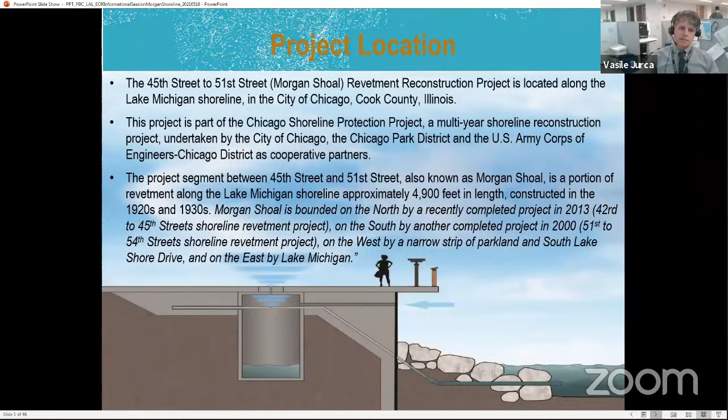The Morgan Shoal Shoreline project is located between 45th Street and 51st Street along the Lake Michigan shoreline. It is approximately 4,900 feet in length and is bounded by two projects already completed north and south. This project is part of the larger Chicago Shoreline Protection Project, a capital improvement project undertaken by the Chicago Park District, City of Chicago, and Army Corps of Engineers to improve and upgrade approximately 9 miles of shoreline.

What makes the Morgan Shoal project unique is the presence of the shoal itself. While the shoal provides protection from some waves, it also poses challenges and offers opportunities for some exciting new solutions.

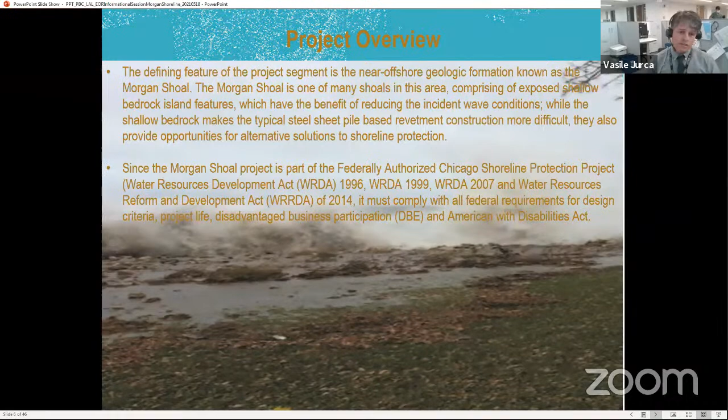As Sarah mentioned, in 2015 the Park District, the City, and Army Corps, using an IDNR grant, developed a framework plan for the Morgan Shoal project area. Included in the process was the local community, elected officials, NGOs, and other stakeholders.

The plan looked at not just adding shore protection, but also at transforming this narrow strip of parkland into a more usable, feature-friendly space. For instance, a natural pebble beach formed at 49th Street over the years, and we've heard repeatedly from the community during the framework process that the plan should include rebuilding that pebble beach.

Community involvement was key to the development of the framework plan and its success. A series of public meetings were held in 2014 and 2015 until the framework plan finally took its current shape. Through the design, we'd like to continue the success of the public engagement process with additional public meetings and outreach.

A little bit of history of the shoreline: Chicago's shoreline is for the most part man-made, with Burnham Park in particular dating from the 1920s. Several iterations and successive improvements were made to the lakefront park system, resulting in the most recent shoreline projects visible throughout the Burnham Park system today, as well as other Park District improvements such as the Burnham Park Wildlife Corridor or the 63rd Street Dune Restoration Project.

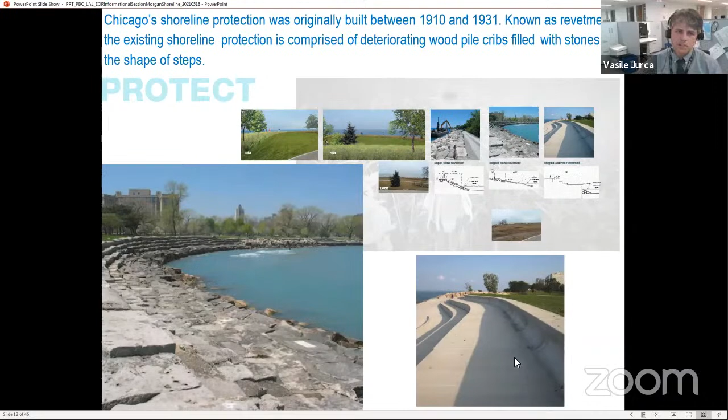The revetments originally constructed were made of stone blocks in the shape of steps sitting on top of wood piles. The current preferred solution for revetments mimics this look, but updated with concrete instead of stone and steel sheet pile instead of wood piles.

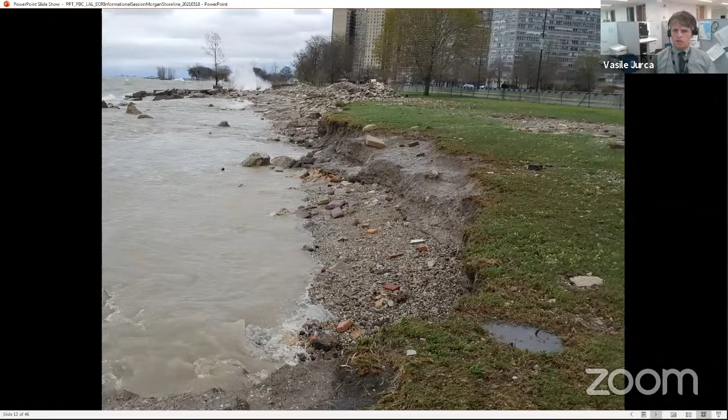Several storms throughout 2019 and 2020, through the period of high lake levels, have done considerable damage to the lakefront at Morgan Shoal. This photo shows an active erosion zone at around 48th Street where a scarp has formed as a result of the battering waves.

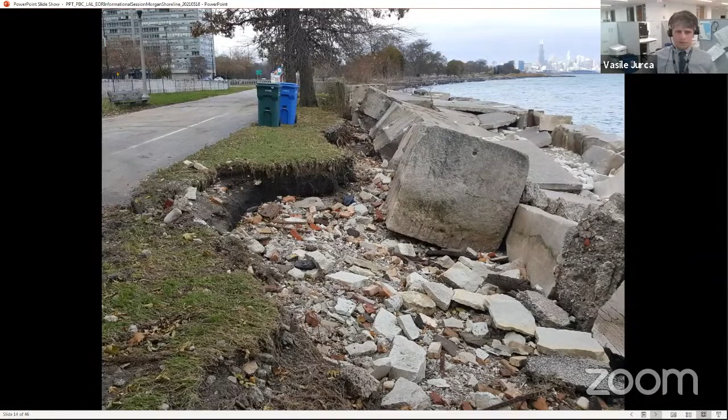Further south at around 49th Street, erosion toppled the old revetment blocks and damaged the parkland and the lakefront trail, as you can plainly see here.

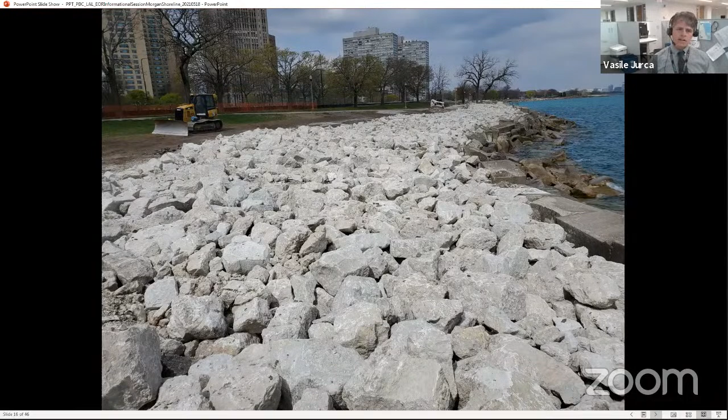Responding to the current erosion and damage, the City, Park District, and Army Corps is currently completing an emergency revetment project consisting of riprap revetment at the most threatened locations along Morgan Shoal.

As well as concrete blocks to add crest height in the most narrow areas. This revetment is temporary, and materials from this current work will be included in the capital construction project. In addition, the Park District placed trap bags at 48th and 47th Street to stop further erosion.

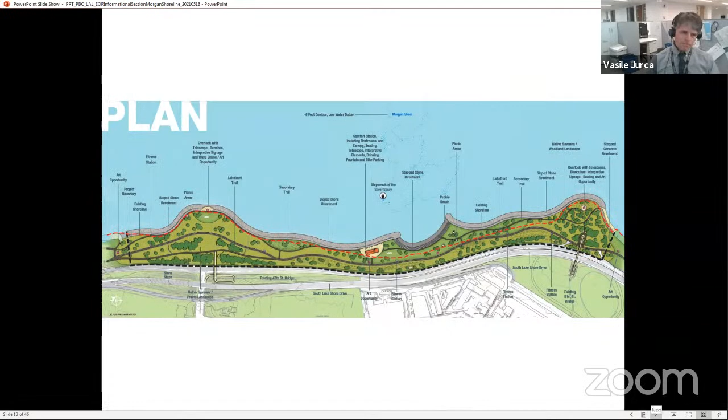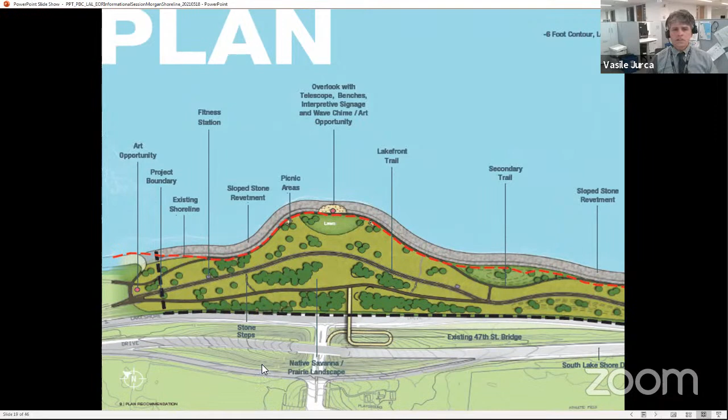Here's an overall plan from the framework plan that came out of the public process. Apologies for the scale, especially on such small screens, but this plan will be made available to all electronically. Let me mention some of the features that the plan incorporated. Of prime importance, obviously, are the protection structures, which are a mix of concrete step revetment, stone revetment, and the pebble beach.

Looking closer at the north end, some of the features include an overlook, a large lawn area, and several trails. Towards the middle and south end of the project, we have a proposed comfort station, a pebble beach at 49th Street, along with picnic areas, an overlook at the south end, and additional connecting trails.

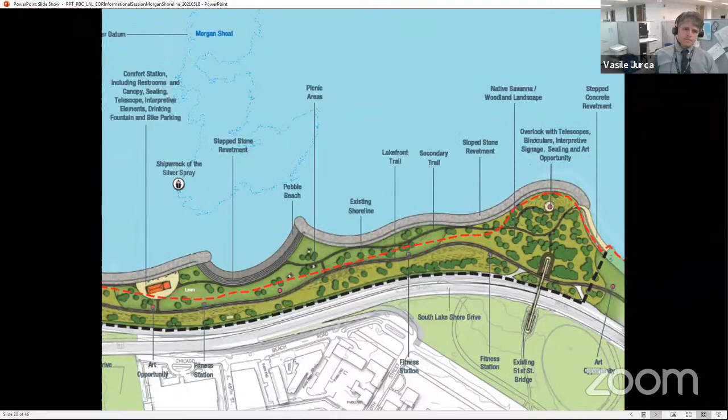The plan, by necessity of protecting Lakeshore Drive, creates an additional 7 acres of land that act as a buffer from storms and the canvas for the amenities already mentioned above.

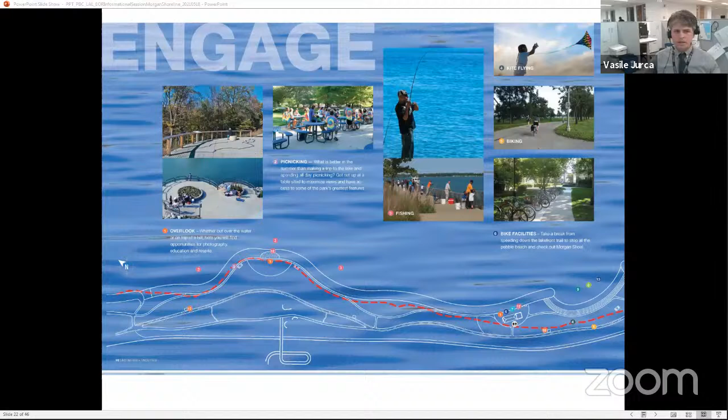The communities, through the framework process, envision the space as offering passive and active zones, which can support activities like fishing, picnicking, kite flying, running, cycling, birding, etc., as well as necessary amenities like the comfort station I mentioned and concessions, and also educational opportunities.

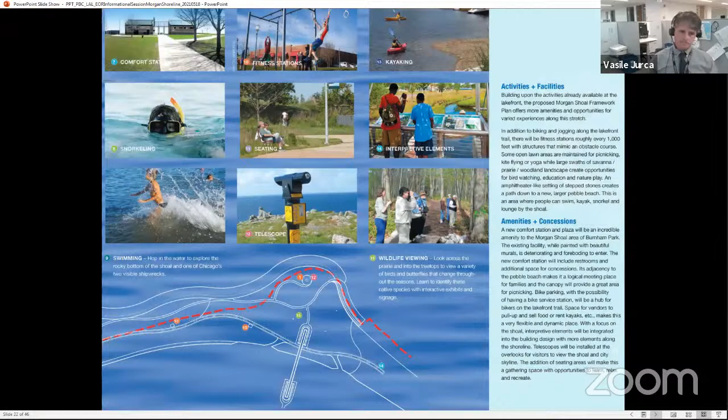Access to this area, north and south, will be continuous through the current lakefront trail system, in addition to access from the west by way of the 47th Street and 51st Street pedestrian bridges.

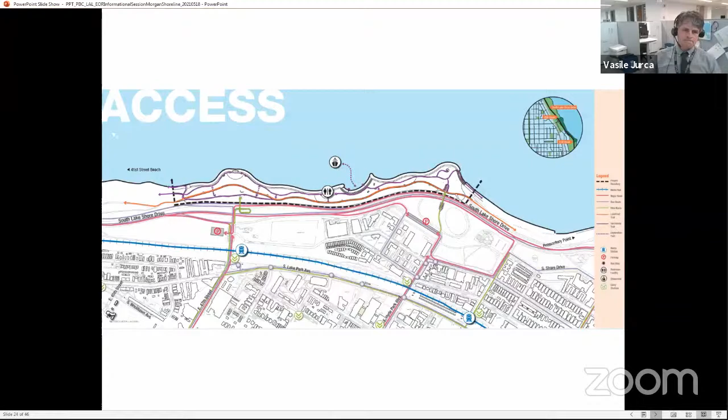Another exciting component for activities is the Lake Michigan Water Trail for human-powered craft, which has been the historical mode of transportation for thousands of years on the Great Lakes. By providing water access, this project creates a link between other sites along the lakefront for watercraft.

Going back to the educational component briefly, installations at Morgan Shoal can include educational signage about the local ecosystem, telescopes at the nodes for distance viewing or birding. Most interesting for me is the concept of a wave chime or sea organ, a series of pipes within a chamber that allow wind to flow through and create natural notes and tones. We've seen this done along the Mediterranean, and it creates a soothing sound that is very interesting. I saw a YouTube video of it, and it's a pretty interesting sound.

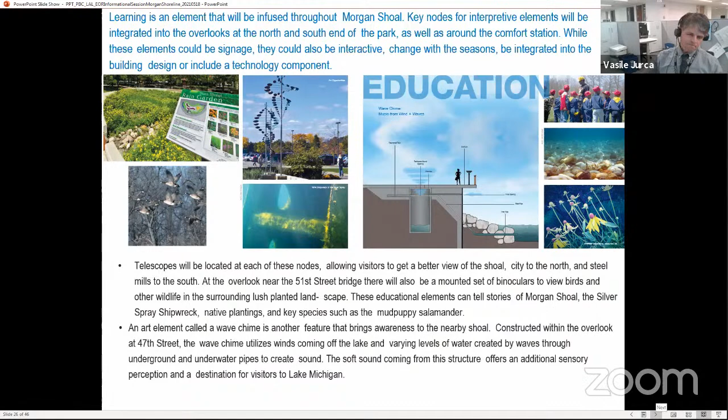Finally, given the location of this project within the Chicago ecosystem, we feel the most appropriate ecological community proposed at Morgan Shoal is what's natural to the area, which is a savanna prairie system.

So now I'd like to turn it back over to Lori for more information on submission requirements. Thanks, Vasile. So again, we appreciate the interest, and we will talk about what our next steps are. Vasile went through the slides, but I want to go over some of the high points we're looking for.

If you're excited about the project, the feasibility framework plan was done by MWH, Stantec, DB Sterlin, Intera, M3 Engineering, Smith Group, JJR, Studio V Design, and Huff and Huff. We wanted to make sure everyone was aware of who has worked on the feasibility framework plan.

These are some of the disciplines, and that's why we put out a big net to determine the scope of work we were looking for. We need civil, structural, geotechnical, coastal, environmental, electrical, hydraulic, landscape, and architecture, and a few other specialties we'll go into. So as you look at your colleagues on the line, make sure you're thinking of possible partnerships and teaming opportunities to cover all those disciplines.

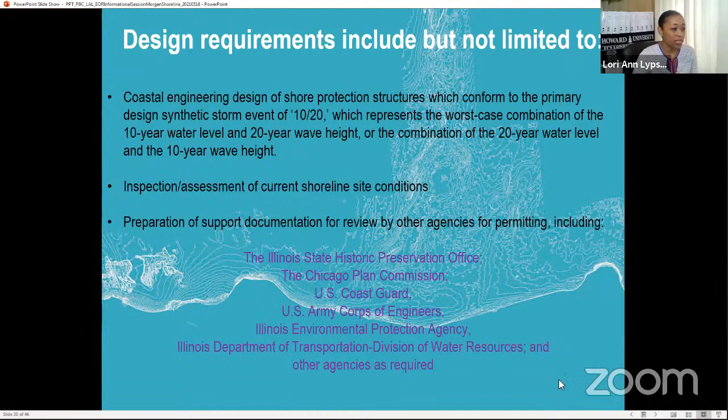Because this project, not only will you work with PBC, CDOT, and the Park District, you'll also have to work with the Illinois State Historic Preservation Office, the Chicago Plan Commission, the Coast Guard, working closely with the Army Corps of Engineers, the Illinois EPA, IDOT, and other agencies as well.

For this project, I know we have some of our construction project contacts on the line too, because they were excited about the project. The anticipated construction cost will be between $30 and $50 million thus far.

We will be negotiating the fees for the architect in July and August, and that is our goal for the schedule. The plan is for the PBC to receive submissions, and we plan to go to our board with a recommended team, the AOR/EOR team. Between Q2 2021 and Q3 2021, we want to do the programming and scope reconciliation.

Right after that, we will go into design and engineering, which we anticipate will take approximately a year. After that, we will go into permit and bid package review, and issue for bid in Q4 2022. That is our anticipated schedule.

So in order to submit, I know we have a mix of folks we've worked with before and some newcomers, which we're excited about. You're going to put together a team and a submission packet that includes a letter of interest. We want this executive summary/letter of interest because it will go to our board with your commitment to scope, schedule, budget, your M&WBE commitment, and it needs to be signed by the principal person in charge of that team.

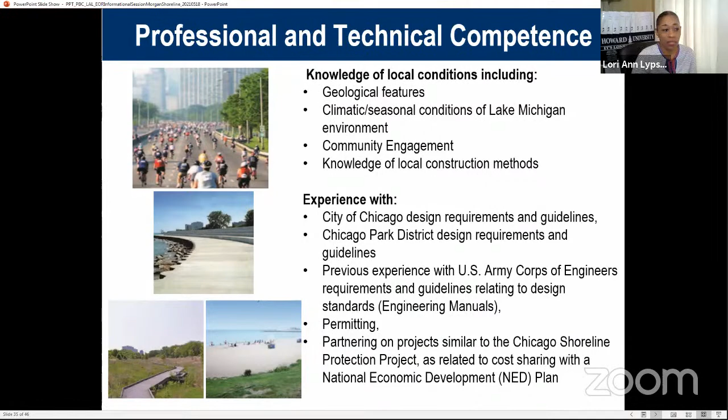We know that's important. Previous experience with the U.S. Army Corps of Engineers, permitting, any shoreline work, any national economic development plan that you've worked on. We also, like I said previously, want to touch on what Sarah talked about earlier, which was the community engagement, and your knowledge of the Lake Michigan environment. I know we showed some of the damage that has happened previously.

Also, we want to see that past project experience. Again, if you've had design of shoreline or revetments, harbor, coves, piers, boat launches, all those things, as well, all those things, we really want to see. And you want to put together that dream team that can show you have the breadth of work that we're looking for.

As you know, we're changing by the minute, and part of that methodology is going to be how do you plan on phasing the project? How do you plan on procuring things in the design process?

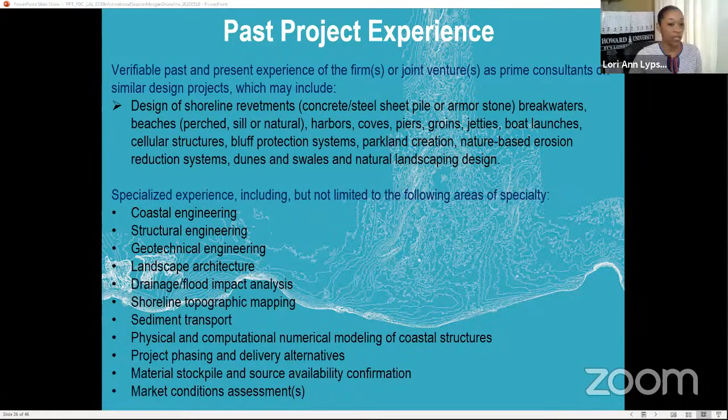I failed to mention that James Borkman is the contract officer for this project. His name is all over the website, in addition to his email.